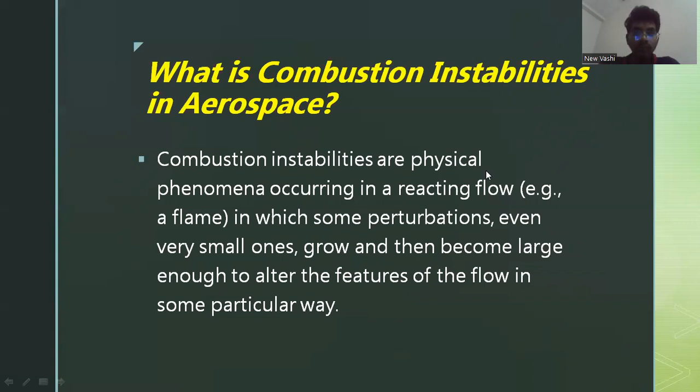What causes combustion instability? In the simplest way, combustion instability can be thought of as the pressure swings in the engine caused by the multiple streams of liquid oxygen and rocket fuel combining and igniting at extremely high pressures in such a way that causes violent vibration. As I said earlier, the violent vibrations cause drastic damage to an engine. The main factor acting on combustion instability is the pressure. The higher the pressure, the more the instability and the greater the damage.

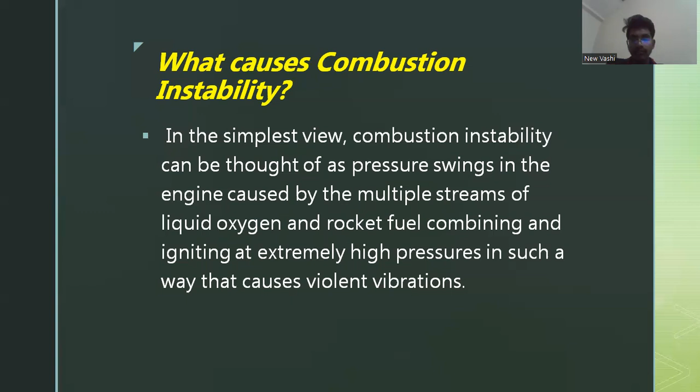Coming to the introduction of this topic, chemical propulsion systems depend fundamentally on the conversion of energy stored in molecular bonds to mechanical energy of a vehicle in motion. In combustion of fuel and oxidizer, burning takes place in a vessel open only to admit reactants and to exhaust the hot products. Higher performance is achieved by increasing the energy release per unit volume.

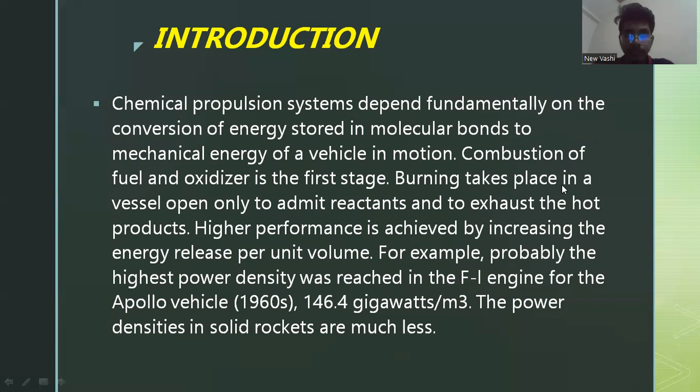For example, probably the highest power density was reached in the F1 engine of the Apollo vehicle, 146.4 gigawatts. The power density in solid rockets is much less. For a cylindrical bore, the values are approximately 0.25 r/D gigawatts per meter cube, where R is the linear burning rate, typically a few centimeters per second, and D is the diameter. Thus, the power density rarely exceeds 1 gigawatt per meter cube.

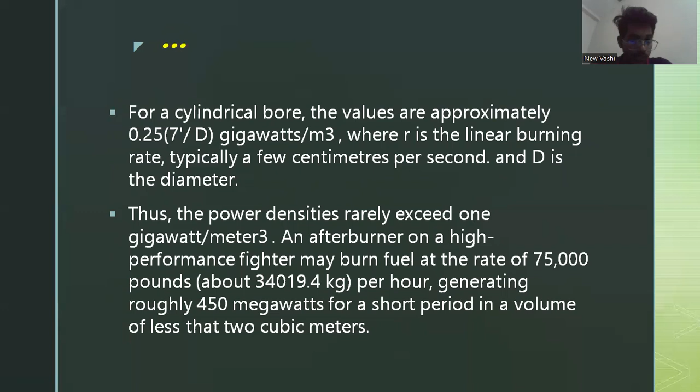An afterburner on a high performance fighter may burn fuel at the rate of 75,000 pounds, approximately 34,000 kilograms per hour, generating roughly 450 megawatts for a short period in a volume of less than 2 cubic meters. These are indeed very large power densities. To appreciate how large, consider that average power consumption per person in a developed country is about 4 kilowatts.

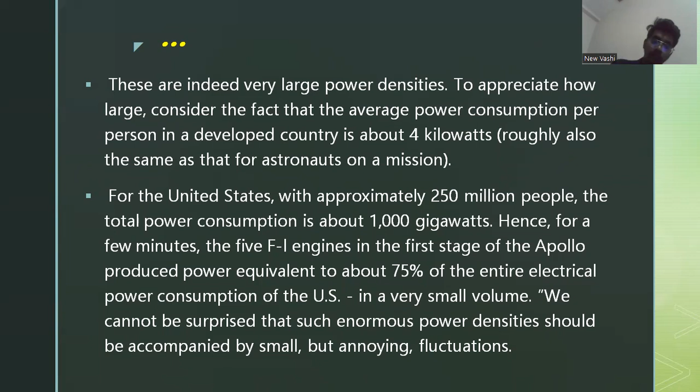For the United States, with approximately 250 million people, the total power consumption is about 1000 gigawatts. Hence, for a few minutes, the 5 F1 engines in the first stage of the Apollo produced power equivalent to about 75% of the entire electrical consumption of the US. In a very small volume, we cannot be surprised that such enormous power densities should be accompanied by small but annoying fluctuations.

Integrated multi-fidelity modeling has been performed for combustion instability in aerospace propulsion, which includes levels of analysis. First, computational fluid dynamics using hybrid RANS/LES simulations for underlying physical investigation, high fidelity modeling. Second, modal decomposition techniques for diagnostic analysis and validation. Third, development of flame response model using model reduction techniques for practical design applications, lower order model.

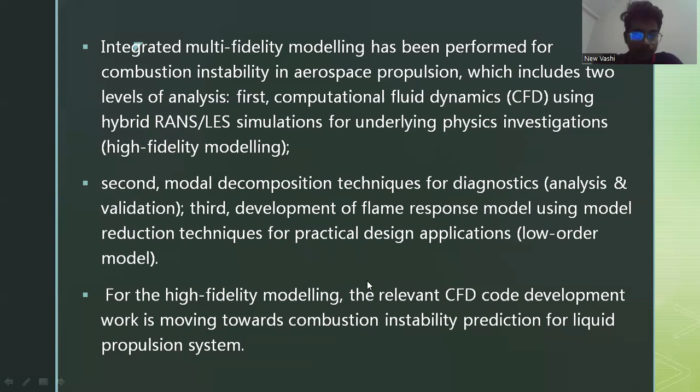For the high fidelity modeling, the relevant CFD code development work is moving towards combustion instability prediction for liquid propulsion. A laboratory scale single element lean direct injection (LDI) gas turbine combustor is used as the configuration that produces self-excited combustion instability. The model gas turbine combustor features an air inlet section, air plenum, swirler, Venturi injector assembly, combustion chamber, and exit nozzle. The combustor uses liquid fuel heated up to 800 Kelvin.

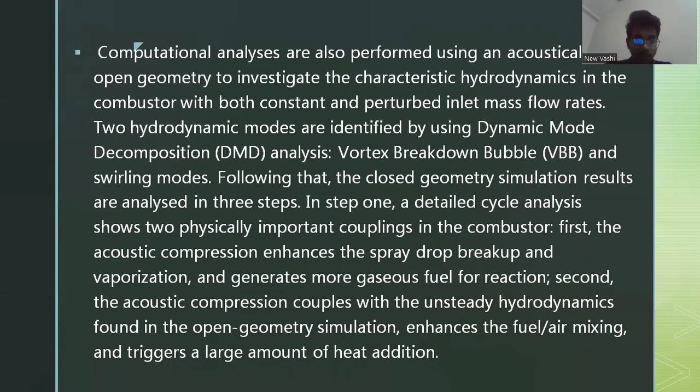CFD analysis is performed using the acoustically open geometry to investigate the characteristic hydrodynamics in the combustor, with both constant and perturbed inlet mass flow rates. Two hydrodynamic modes are identified using dynamic mode decomposition analysis, a vortex breakdown bubble and a swirling mode. Following that, the closed geometry simulation results are analyzed in three steps: detailed cycle analysis and the important couplings in the combustor, acoustic analysis, and breakdown.

The ROM, reduced order model, can be used at the engineering level to provide an efficient prediction of combustion stability for practical design. Once the ROM is established, it can be used as a lower order test bed to predict results within a certain parametric range.

Moreover, certain criteria during ROM development are established about the necessary number of POD modes that should be included to guarantee a stable ROM. The numerical discretization needs to be consistent between the original CFD and the developed ROM. Furthermore, the predictive capabilities of the resulting ROM were evaluated to test its limits and to validate the value of applying broadband forcing to improve the ROM performance.

In part 2, the exploration is extended to a vector system of equations, using the one-dimensional Euler equation as the model equation. A numerical stability issue is identified during the ROM development, the cause of which is further studied and attributed to the norm. As we have seen earlier, the frequency-based DMD technique provides modes corresponding to all frequencies for the lower order modeling.

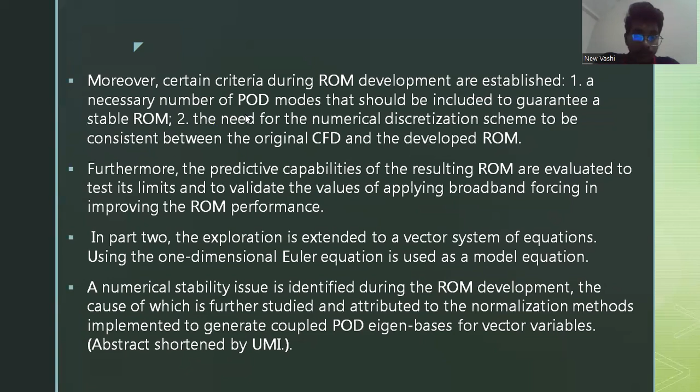Fundamental aspects are examined. The POD derived eigenbasis is used in conjunction with a Galerkin procedure to reduce the governing partial differential equations, so a set of ordinary differential equations constitutes the ROM. The detailed assessment is performed on the method in two parts. In part one, a one-dimensional scalar reaction advection model equation is used for fundamental investigations, which include verification of the POD eigenbasis calculation and the ROM development process.

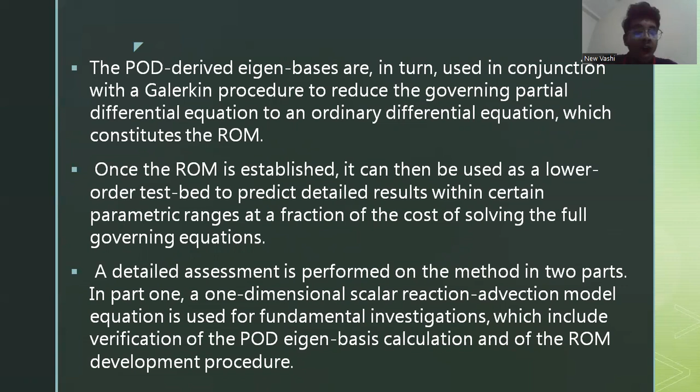Why is combustion instability a problem? Combustion instability causes severe damage to engines, which cost crores or millions of dollars. Combustion instability can cause severe vibration, increased localized heat transfer, decreased performance, and other problems. In especially severe cases, the engine structure or propulsion system may be damaged or destroyed.

As I told earlier, combustion instability is a serious problem which destroys the engine and the rocket, the combustion chamber with the propellant and exhaust. So this is all my explanation about combustion instability.